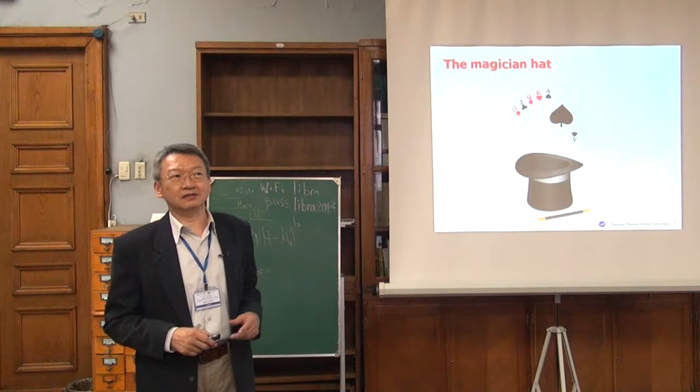Instead of a hydrologist or a professor, I prefer to think of myself as a magician, because of the magician's hat. You all know the magician performance, the rabbit coming out of the top hat. Maybe you're tired of the rabbit and prefer a rose, a scarf, or a poker card. But we never know what will come out next, because the magician's hat is not transparent, and we don't know the detailed structure inside, so we cannot predict what the next object will be.

So maybe our watershed is just like this black box. We do not have enough knowledge to catch all the detailed processes of hydrology. Maybe you oppose my opinion because you think we already have very good skill to do simulation, but maybe we can discuss this topic.

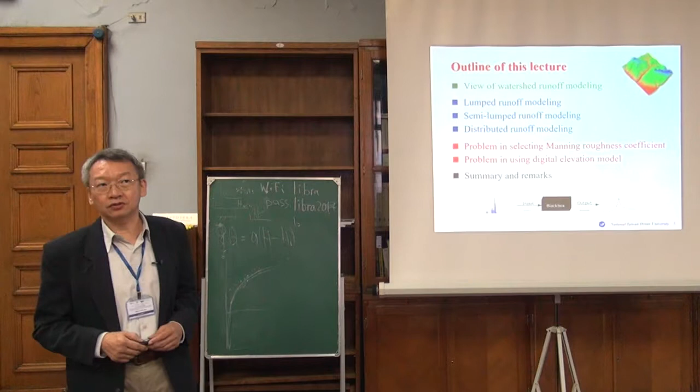The outline of this lecture: we describe the view of watershed runoff modeling, moving from lumped to semi-lumped to distributed runoff modeling, since more knowledge about the watershed rainfall-runoff process is included in this approach. But I think there's still a problem in selecting Manning's roughness, and also because distributed runoff modeling requires the digital elevation model, which is also a problem.

For the view of watershed runoff modeling, previously hydrologists tried to view it from this side: we collect rainfall data and runoff data, and then we build up the black box like this.

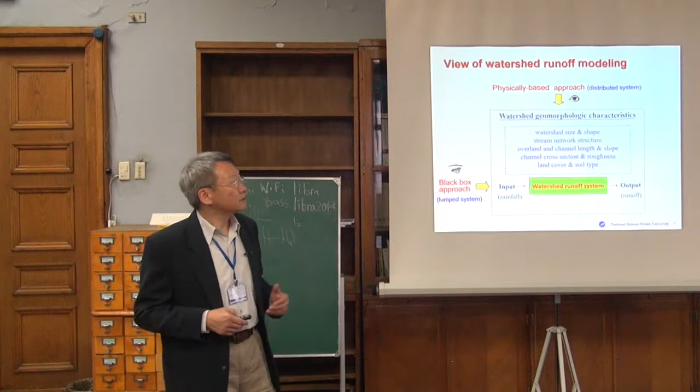When we know more about the detailed process, we try to collect data on watershed size and shape, stream network structure, overland and channel flow length and slope, channel cross-section, roughness, land cover, and all detailed information. Then we think we have enough capability to make a physically-based approach.

But is that true or not? That's my question. I think the whole knowledge system works like this: we collect a lot of data, and when we understand the relation, we change the data into information, and then we have knowledge. If we understand the relation pattern, then we have wisdom to catch all the principles.

In the hydrologic process, we collect rainfall, discharge, soil, land cover, and watershed topography data. Then we try to bridge the rainfall-runoff relationship, and the relationship between slope and runoff, and soil and land cover and runoff. Finally, we think we have enough knowledge and capability to build hydrologic modeling, hydraulic modeling, and do watershed management because we have a model.

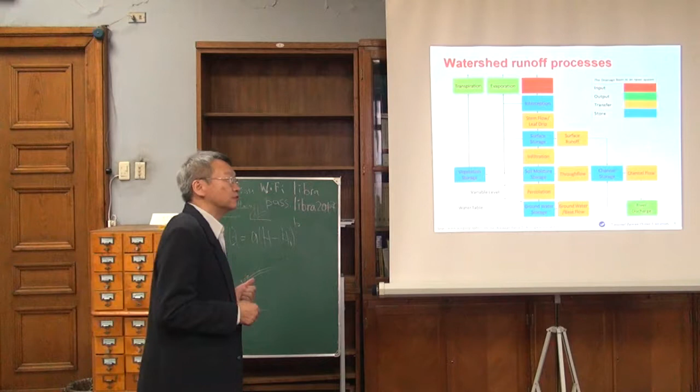So I'm not sure what state we're really at—maybe we don't have enough knowledge to do that. In the first-year hydrology course, we learn about the input precipitation leading to the output, the river discharge, and all the detailed processes: evaporation, infiltration, evapotranspiration, and all the storage. So we think we have enough capability to do hydrologic modeling.

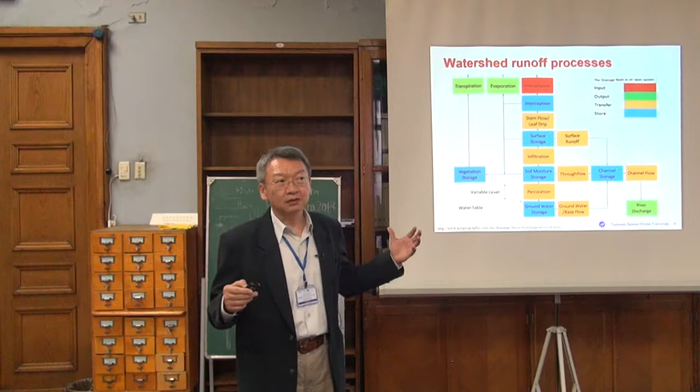But maybe our knowledge is limited—for example, with evaporation, we can catch the detailed phenomena from an evaporation pan, and we understand the infiltration process from an infiltration plot, but only at a very small scale. For a watershed, that means maybe 100 square kilometers or 1,000 square kilometers, and at that scale the link is not so clear. So maybe that's the problem.

So we try to move from the lumped approach, because we just need to know the rainfall and the runoff, and then we have a simplified function to do this simulation.

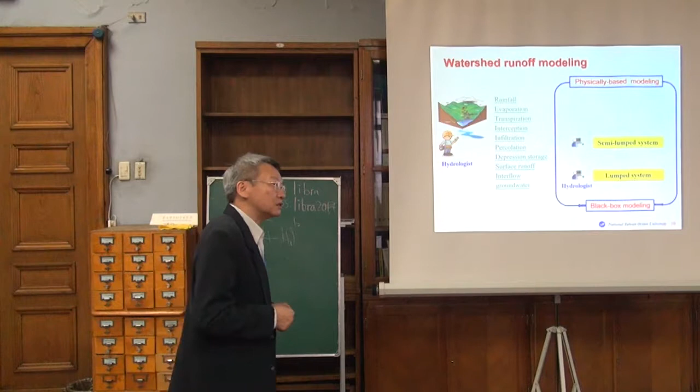And when we get more detailed information, we try to do the semi-lump, and finally distribute it. We think, or we hope we can do this thing. So from the lump, the most early hydrologic doing,

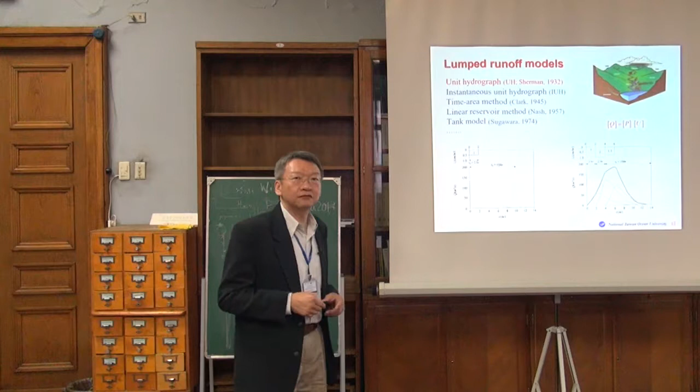lump runoff model like unit hydrograph. I think all of you know that we only collect the data, rainfall data, and the runoff data, and then we have this function, unit rainfall and unit runoff. So the time distribution of this runoff, and then we can use linear proportional and linear superposition to estimate the possible outflow at the watershed outlet, and then instantaneous unit hydrograph, because we don't want to do too much transfer from different duration of the UH, and also the time area method.

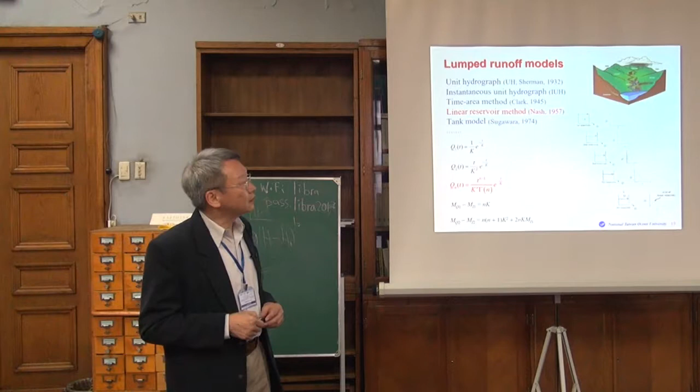If we got a map, then we can do the simulation, and the linear reservoir is a famous one. So the watershed rainfall runoff process can be simulated by a series of linear reservoirs.

Old tank model, I think yesterday we mentioned about this one. And basically this tank model can be simulated as a linear reservoir model in series or in parallel. So a model like this we can transfer into a series of linear models.

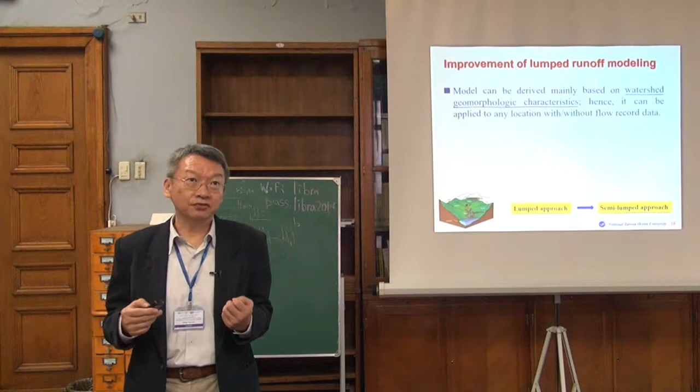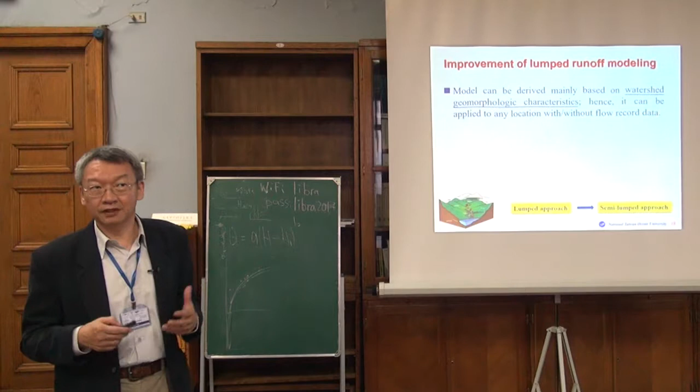So when we want to move from the lump model to semi-lump, we hope our model can be derived mainly based on watershed geomorphology characteristics. So we don't rely on the measured data. We may not have to collect all the detailed discharge data, and then we only base it on the watershed geomorphology characteristic, and then we know all the mechanism.

And also we hope our model can be performed with high efficiency, because when you get more mechanism into the model simulation, you need more time for computation. So that's maybe a problem.

If we get more information and we have a lot of time, this kind of model may not be applicable for real-time forecasting. So of course we also think, because the previous lump model is linear, we hope when we try to modify from lump to semi-lump, we can account for watershed hydrodynamic property, if we can consider the watershed nonlinear or time variant characteristic. That's what we hope. So we move from lump to semi-lump distributed, semi-lump runoff modeling.

So I think the first, maybe the earliest one, is the U.S. Soil Conservation Service synthetic hydrograph model. In this, they try to collect more information instead of only watershed area as in most lump models. So they collect watershed length, slope, and land cover as a curve number. So that's land cover, soil type, and antecedent condition of the watershed. In this case, they have moved from the lump model to semi-lump model.

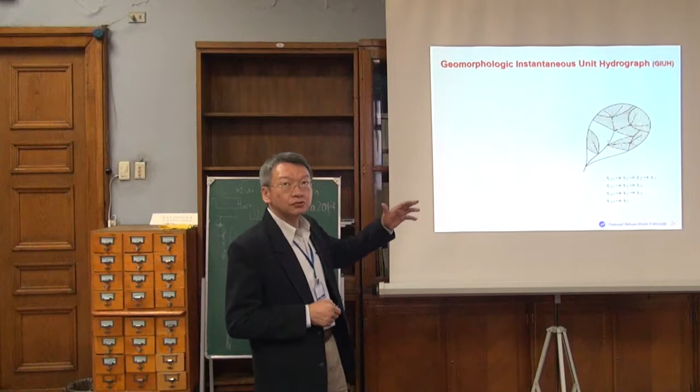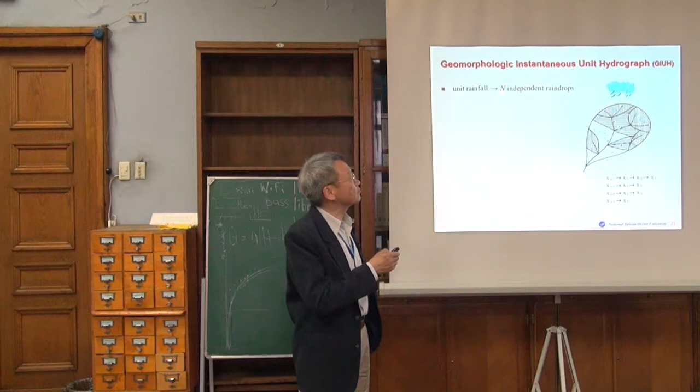For unit rainfall, he assumed this unit rainfall consists of n independent raindrops. So for a raindrop falling on the first order overland, then to the first order stream, second order stream, to third order stream, to the watershed outlet. So for another rainfall particle falling on the second order overland flow, then second order channel, to the third order channel, to the watershed outlet.

So in this third order watershed, all the runoff paths can only be separated into four different flow paths. That means the first order overland flow to the first order channel, to the second order channel, to the third order channel. And this one is second order overland flow to the second order channel, to the third order channel, to the watershed outlet.

In this approach, we don't want to do distributed grid-based routing. In a third order watershed like this, there are only 4 different flow paths, so you don't need to do a lot of computation. You only do 4 different flow path routings. Each flow path can have a probability of a raindrop adopting that specified flow path.

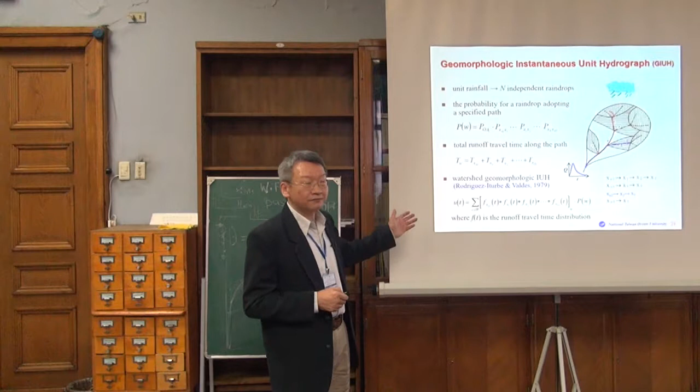After we have the runoff travel time along a specified runoff path, we can derive the detailed watershed geomorphologic IUH. We use a probability distribution because, as this figure shows, there are a total of 7 first order streams with different lengths, different slopes, and different channel cross sections. So if we try to group the first order channels or first order overland flows, we use the probability distribution.

And then we can change from the runoff travel time here to a convolution. This convolution integral is the IUH of the watershed geomorphologic IUH.

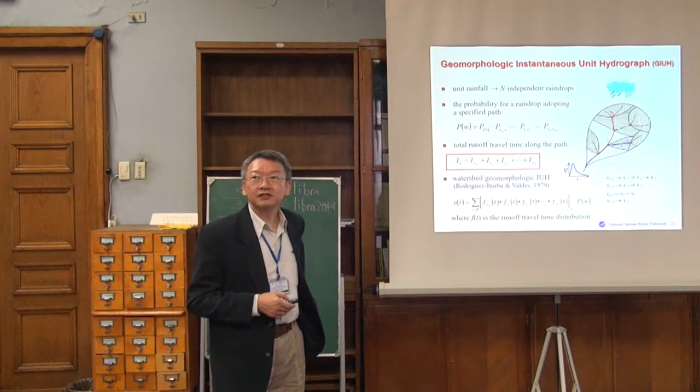So the next problem is how can we precisely estimate the runoff travel time. Previously, we already have the runoff travel time for the overland flow. We consider the overland flow length for each order, the overland slope, the overland flow roughness, and the rainfall intensity, and from these we derive the overland flow travel time for each order, which we derived in 1997.

If we use a digital elevation model to extract all the detailed geomorphology characteristics and information, we can use this equation to derive the overland flow and channel flow runoff travel time, and then we can have the detailed structure of the runoff process from upstream to midstream to downstream to the watershed outlet.

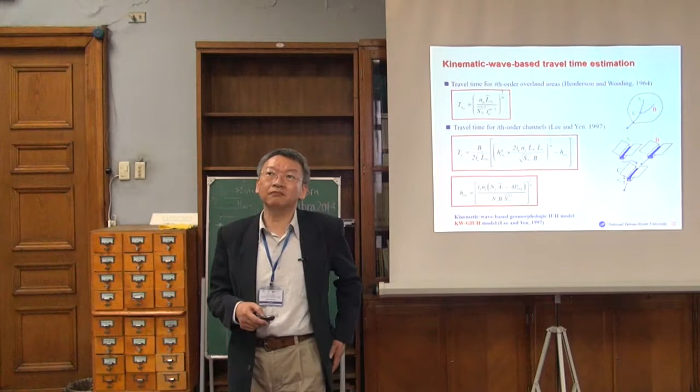So we call it the kinematic wave-based GIUH model. This kinematic wave GIUH - you know the IUH, and GIUH means the geomorphology IUH. KW-GIUH means the kinematic wave-based geomorphology IUH model. We developed this model in 1997.

Here is the basic structure of the model, because we assume the probability distribution is exponential distribution, which is what we usually use in the linear reservoir model. We have another study trying to extract the geomorphology factors from a watershed to see if the exponential distribution is adequate to simulate the runoff travel time. Basically, the exponential distribution is good enough for this simulation.

Once we have a digital elevation model and obtain all the detailed geomorphology factors, like the overland flow length and slope for different orders, and the channel length and slope for different orders, and the stream network structure of the watershed, we can have an analytical solution for this kinematic wave-based GIUH model.

You can see from this figure, because we hope our model can consider the hydrodynamic effect, we use the kinematic wave, which can consider the rainfall intensity. In this equation, for the overland flow runoff travel time, you have a rainfall excess intensity, and for the channel, we also have IE, the excess rainfall intensity.

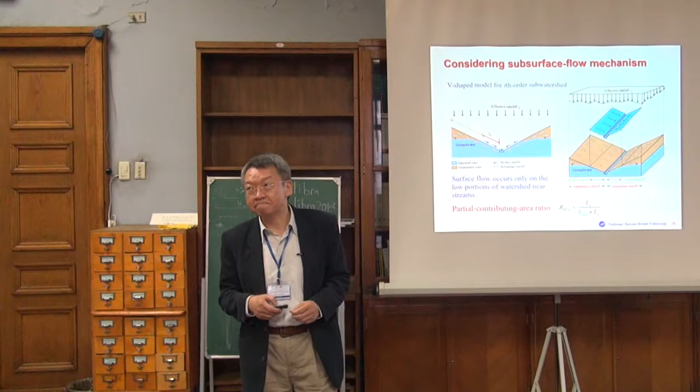Of course, at the beginning of the runoff simulation, it depends on the antecedent soil moisture condition, which we can account for if we have the rainfall data. As we get more rainfall on the soil, the partial contributing area increases gradually.

So we did this simulation and changed the structure of our rainfall-runoff model. We consider the flow path probability — we have surface flow and subsurface flow. For the runoff travel time, we consider both the surface flow travel time and the subsurface flow travel time, and also two IUHs: subsurface IUH and surface IUH. We assume these can be linearly superposed. So this is our model structure.

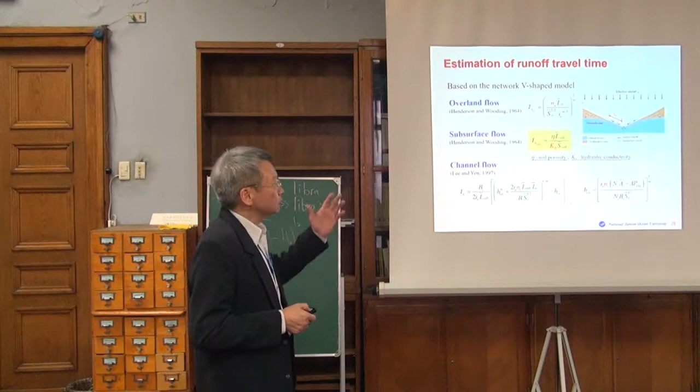We changed it from only considering the surface flow to further considering the subsurface flow mechanism. For the surface, as before, we use the overland flow with the Henderson and Wooding equation, and we also derived an equation for the subsurface flow, and in 1997 we derived the equation for the channel flow. After that, you can see the previous n value now comes down to 0.6.

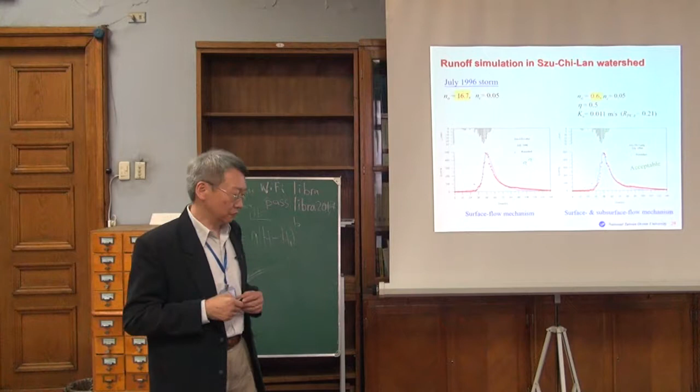This is because we included the hydraulic conductivity in our model. So I think this model parameter value is now acceptable, and we believe we have achieved a physically based approach — of course, it's still just a semi-lumped approach.

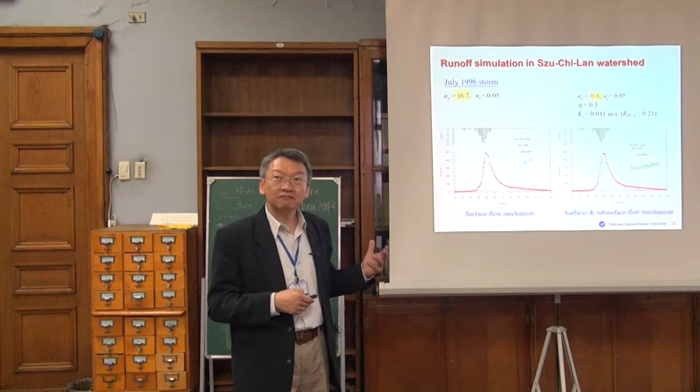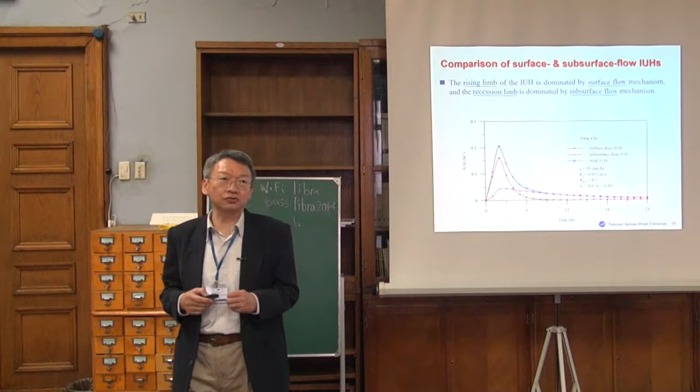I think we only used a semi-lumped distributed model to simulate all the hydrodynamic effects, and we got a very good result. The rising limb of the IUH is dominated by the surface mechanism, and the recession is dominated by the subsurface. So here we just mentioned the partial contributing area, which depends on the antecedent moisture and the total rainfall in this watershed.

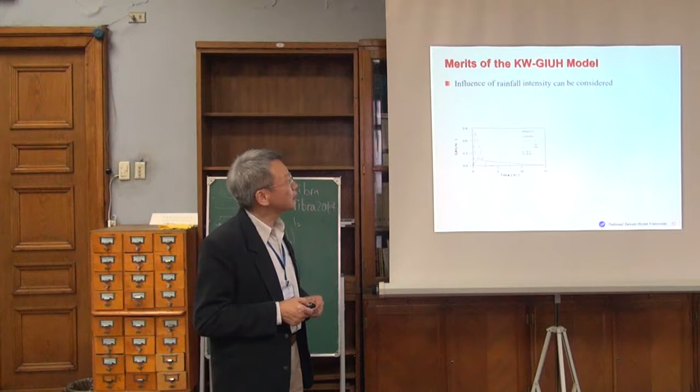So here's the merit of the KW-GIUH, we call it the kinematic wave geomorphology IUH approach. In this approach, the influence of rainfall intensity can be considered, and the influence of urbanization change can also be simulated, because in Taiwan we use this, since we can consider the runoff coefficient and also the overland flow roughness and channel flow roughness.

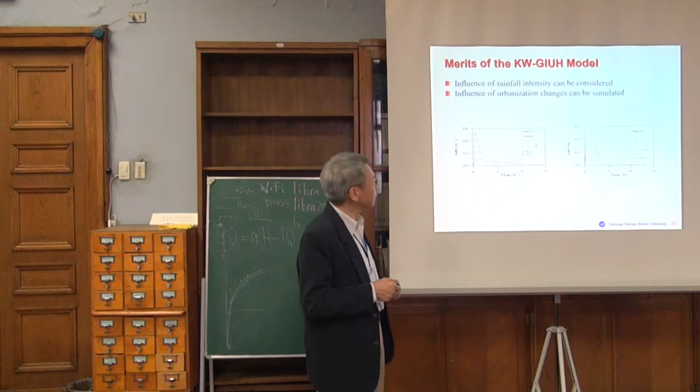When watershed urbanization occurs, the overland flow roughness will decrease, so based on the change of Manning's overland flow roughness, we can simulate the influence on the runoff hydrograph. Also, flow frequency analysis in ungauged areas can be performed.

We use this for some ungauged watersheds in Taiwan, because we have long-term rainfall data. We put all the rainfall data into our model and obtain all the detailed geomorphology factors using a digital elevation model, and then we can do the simulation. So if we have 30 years of rainfall data, we can generate 30 years of runoff data and do the runoff simulation.

We have tested this on several, many watersheds, I think more than 10, and used this model to predict the frequency analysis in ungauged watersheds.

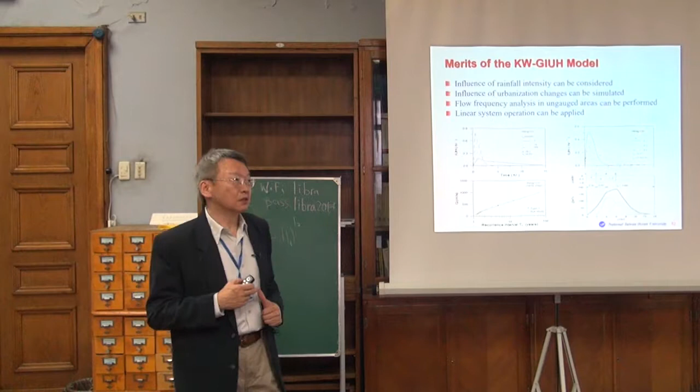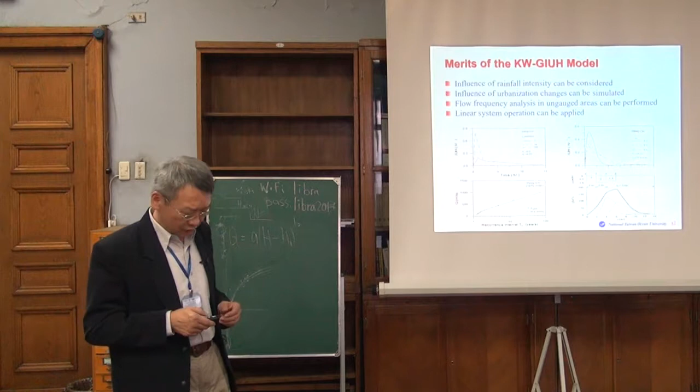Also, because we use linear proportionality and linear superposition, all the computation can use linear system operation. So we do not need a lot of computing time, and we can do real-time forecasting. So this is the model we have done.

This model has been applied to Taiwan, in more than 85 watersheds, and basically we have very good simulation results.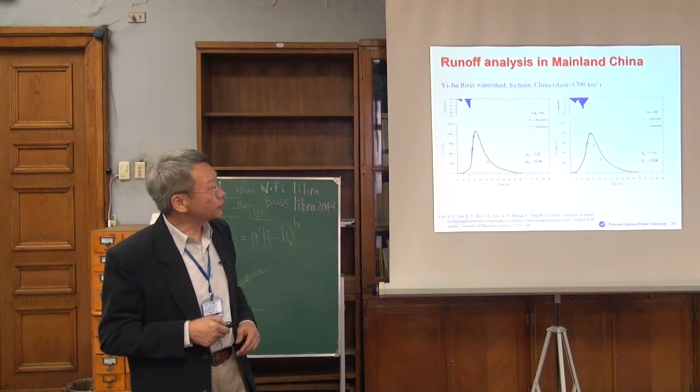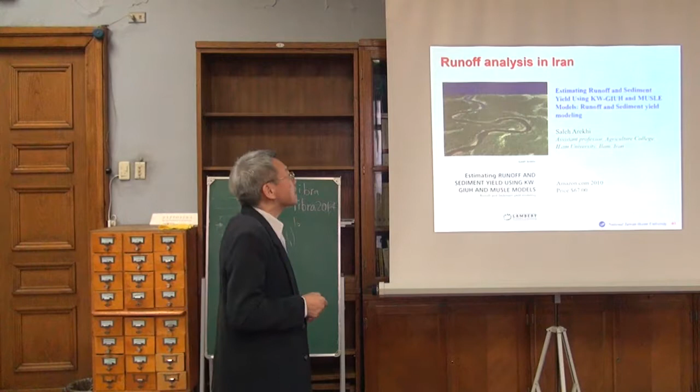This model has also been applied to Russia, because I have an international cooperation project with Dr. Gassman. It has also been applied to the United States, mainland China, India, Palestine, and Japan. Even one hydrologist in Iran wrote a book about the KW-GIUH and MUSLE, but I have never met this person. The model is currently applied in more than 8 countries in the world.

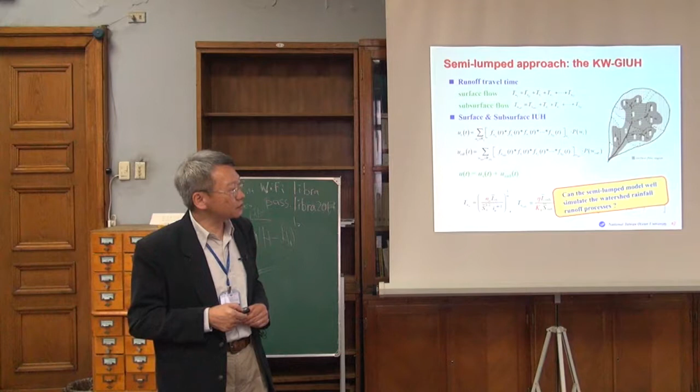So the question is, can the semi-lumped model simulate the watershed rainfall-runoff process? From my point of view, no. This is because in this approach, we group all the first-order streams and all the first-order overland flow into a group.

So we try to use a probability distribution to include all the spatial variation, the non-uniform distribution of the watershed.

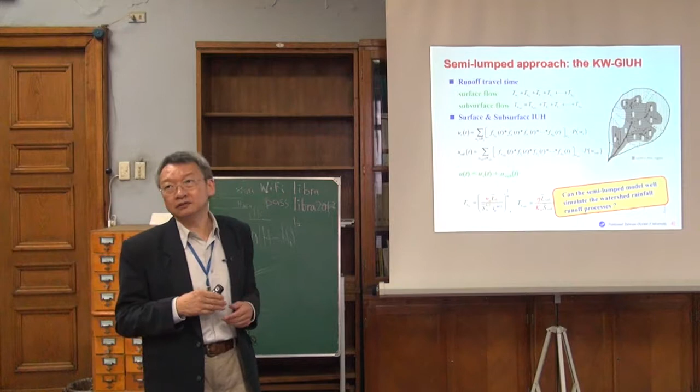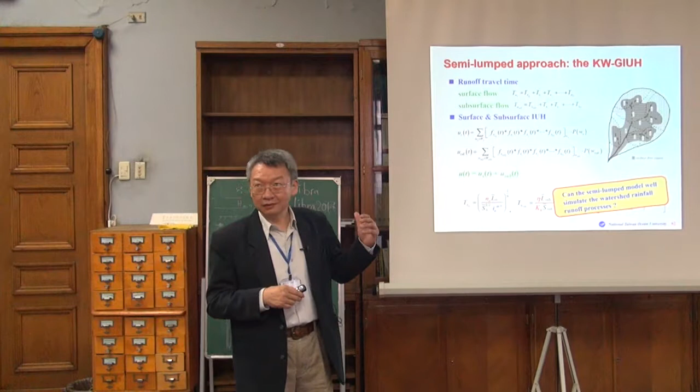So I think maybe, if possible, if we have enough computer capability to do fast computing, we should move from the semi-lumped model to a distributed model. That's what I'm trying to do. Maybe we should reach toward distributed runoff modeling.

All the model input requirements include very detailed rainfall, runoff, digital topography data, land cover data, and channel cross-sectional data. If you try to use the distributed model, the practical problem is that a lot of computing time is required for the runoff simulation.

Of course, if you have a supercomputer, maybe you can do this for real-time flood forecasting. But I think we do not have enough supercomputing resources, so for real-time flood forecasting, usually we cannot use this kind of model.

So if we try to use this approach, the problem we need to solve is how to increase computing efficiency. That's what we need to do, because all the dynamic wave, diffusion wave, and even kinematic wave models do not have an analytic solution.

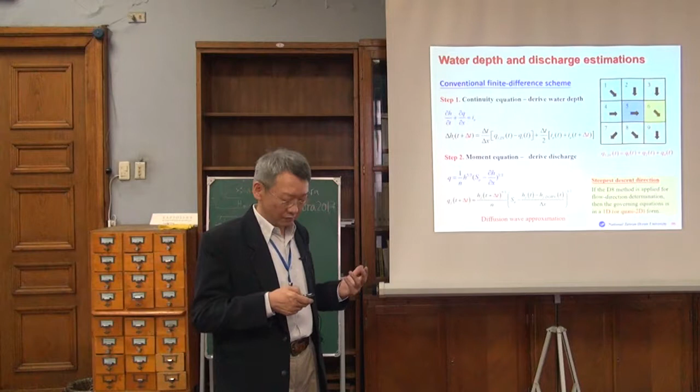Because if you try to select a very small delta t, you need a lot of computing time. But if you try to use a large delta t, then maybe you cannot detail describe the wave transport. So we are thinking how to determine the adequate delta t. We hope we can use a large delta t, but instability problem is the next one we need to face. So the most important thing for numerical simulation is trying to select an adequate computing time interval.

Previously there were two criteria for stability for the numerical instability problem. The first one is the Courant-Friedrichs-Lewy condition. That means the numerical marching speed, delta x divided by delta t, must be larger than the wave celerity, and then we can accurately describe the moving of the flood wave.

So we can use the Courant restriction equation expressed like this, and from this we can determine the delta t. So we use this delta t to avoid the numerical instability problem. That is the first criterion.

And the second one is the Courant condition. In a flat, mild slope area, for the first time step the water level is higher on the left side, and it moves from the left side to the right side. After t plus delta t, too much water moves from this side to that side, so the water level in the next time step is higher, and the right side becomes higher than the left side.

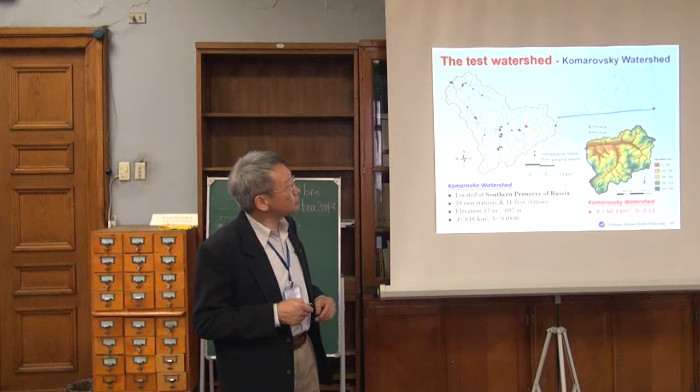So we have two limitations when we want to do the finite difference equation. And of course you want to know exactly what the value for this delta t is when we do a practical rainfall runoff simulation. We use the data from the Komarovka watershed.

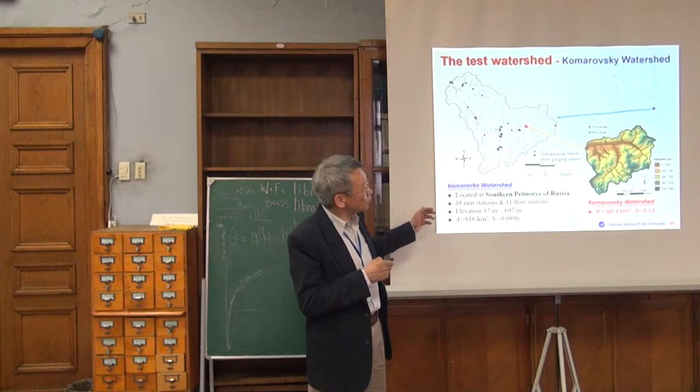Previously, I think the Komarovka watershed is an experimental watershed, and the total watershed area is around 600 square kilometers. It's too large for this test, so we try to only use a small subwatershed, Komarovsky, which is only 60 square kilometers.

So you can see, because we use this flow hydrograph to demonstrate, the second hour is just the beginning of the storm, and the 20th hour is the peak time of the storm.

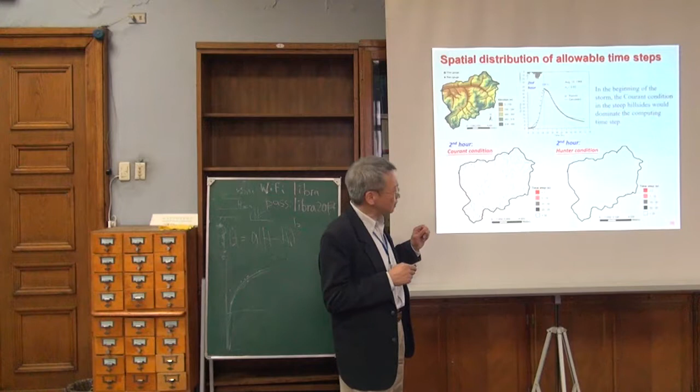So you can see, if delta t is determined under the Courant condition, the black line is about 20 or 30 seconds. Because under the Courant condition we consider if the velocity is high, then for the upstream of the stream network the velocity is quite high, so under the Courant condition the small time delta t required is just like the stream network.

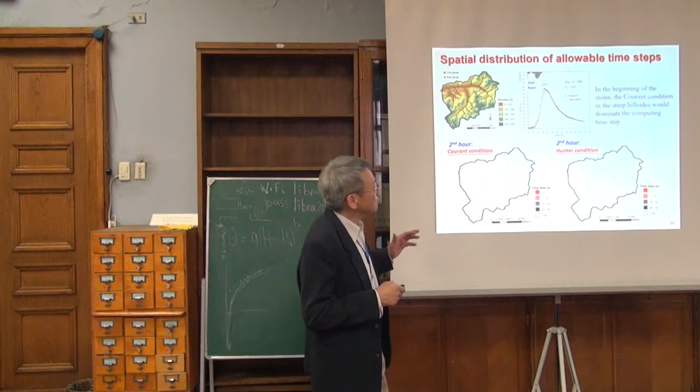And because at the very beginning only a little water enters the watershed, there is no flat area. So basically, under the Courant condition, all the calculation time steps are larger than 30 seconds. So at the very beginning, the Courant condition dominates the selection of the computing delta t.

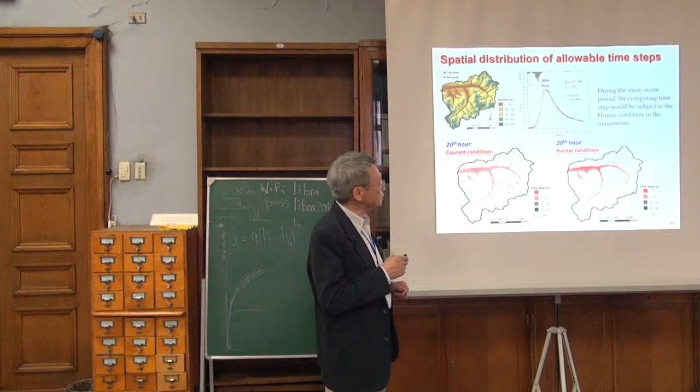So for the 20th hour, this is the peak time. You can see under the Courant condition, because a lot of water has collected into the stream network, in this portion most of the delta t selected is less than 1 second, only around 1 second. And of course for the Courant condition it's less than maybe 0.001 second.

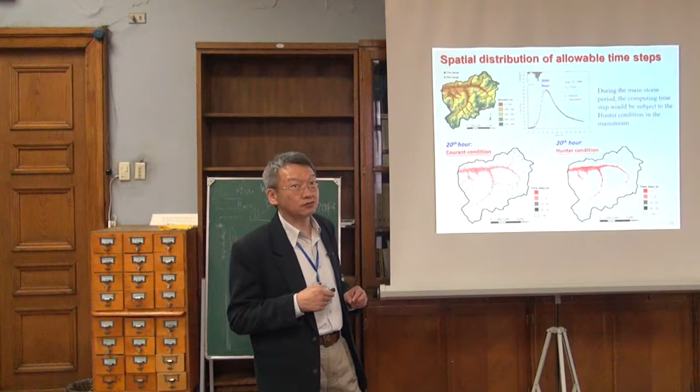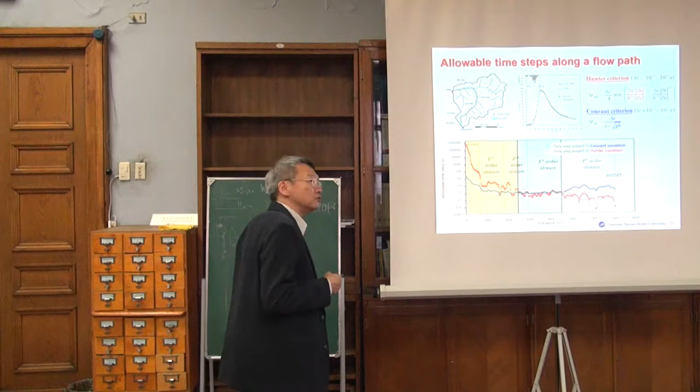So once the downstream requires a very small time interval, all this grid needs to use a very small time interval. This results in all the computation in most of the period, in a whole storm simulation, needing a very small time interval, which results in a very long time for this simulation. So in most cases, we cannot apply this distributed model for real-time flood forecasting.

So because we met this problem, we are trying to see if we can make some changes so that all this computing time interval can be enlarged.

One approach was proposed by MacCormack, a recursive formulation. Here, the original first step is we use the continuity equation to derive the change of water depth, and then MacCormack proposed an equation like this.

This is a little complicated, maybe I can explain it next time in the next PPT. Once we estimate the water depth from the continuity equation, we can use this in the momentum equation to derive and estimate the discharge.

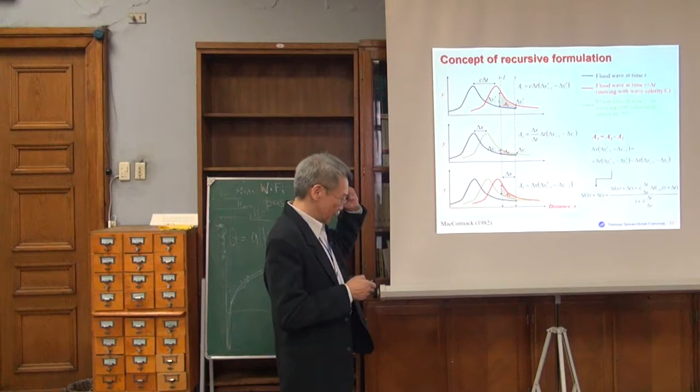So the problem is, what is this? Maybe we can use this figure to explain. Here the black one is the flood wave at time t, and the red one is the flood wave at time t plus delta t, moving with c, the flood wave celerity.

At time t plus delta t, the flood wave should move to this place. This is the distance, this is the water depth. If we choose a large delta t, because MacCormack's modified recursive formula tries to modify the water depth, he used an enlarged delta t.

So when you use an enlarged delta t, that means the numerical marching speed is very slow compared with real-time flood forecasting — the flood transport appears slow. You can see when we use the MacCormack scheme, we get a green hydrograph, and this green hydrograph is slower than the red, the real hydrograph.

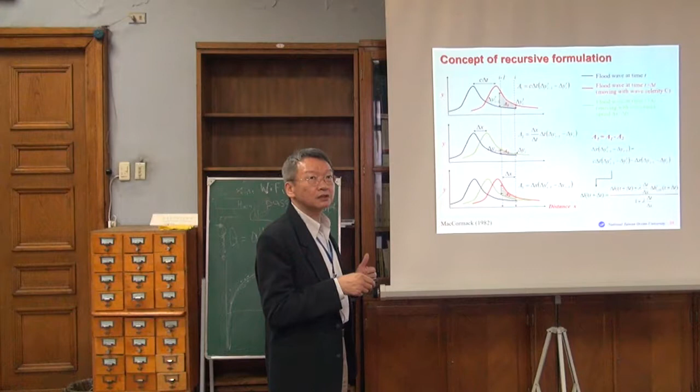So the modification tries to adjust for the deviation of this hydrograph. He used this kind of equation, and after using this equation, they can modify the increment of water depth.

But in 1982, MacCormack derived this equation, and it can only be used in one dimension. That means when we estimate the blue point, before that we need to have the red point, this term, the red point, so it can only be used in one dimension.

Like a river, so we already have this point value, and then come downstream step by step. For our case, we use a digital elevation data set, which is basically two-dimensional. We usually calculate from the left corner to the right lower corner, step by step.

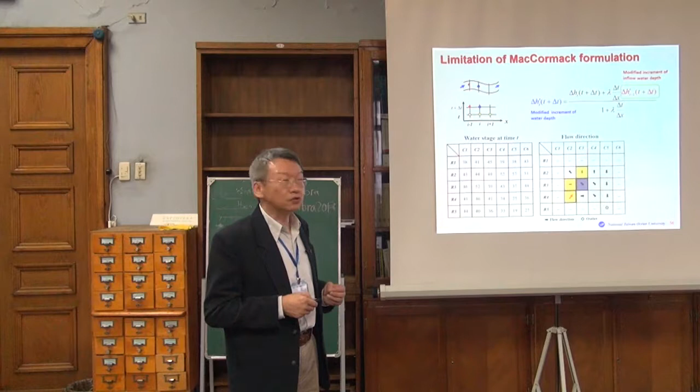So if we want to estimate the water depth at this point, of course flow comes here, and this also. It's okay, but when we calculate at this location, we do not have this value. So the MacCormack recursive formulation cannot be used in this case, and we're trying to remodel this approach since we cannot use this formulation.

So we propose a new sorting scheme for the computation sequence. That means we sort the water stage of each cell, the value being the water stage at time t. So you can see this is the highest one, this the second one, third one, and the fourth one.

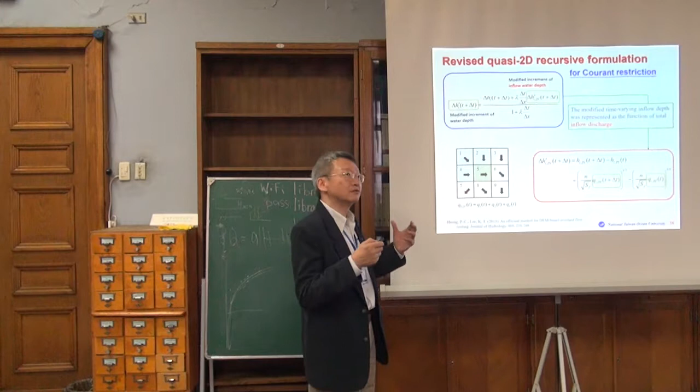So we're sorting this, and this is the first, second, third. The sorting time is quite limited in comparison with the previous approach. We choose a very small delta t. After we assign the routing sequence according to the descending order of the water stage, we can do the simulation. We also transfer from the water depth to water stage discharge, so we can do the summation, because the flow collects from different directions of the nearby grid.

The other condition we need to consider is the Courant condition. It's fortunate, I think we are lucky, because Bates in 2010 derived the modified diffusion equation, since previously we used a diffusion wave equation like this, omitting all the inertial terms. He found that if we consider the local acceleration, we can avoid the reflux, the back and forth flux we mentioned. So we have this equation, and this local acceleration included in the momentum equation can alleviate the checkerboard oscillation we mentioned.

So we integrate all these into a modified numerical scheme, and then we can accumulate the inflow discharge step by step. Here is the result. Originally we may have needed a very small time interval, like 0.001, but now for the whole process we can use 60 seconds from the beginning to the end of the storm flood.

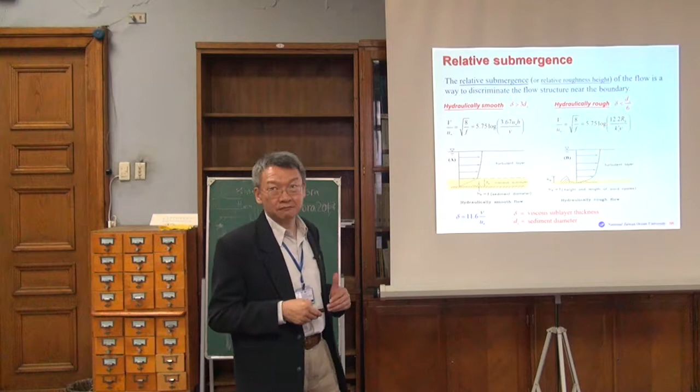Two problems I propose here. The first is the Manning's roughness coefficient. Manning's equation - you know about Chezy, Manning, and Darcy-Weisbach. Darcy-Weisbach is more applied in pipe flow. There have been a lot of experiments trying to use different boundary roughness to describe the flow velocity distribution. However, this equation, in most cases, is not used in open channel or stream network computation - so we use Manning's.

But I think Julien did a very good report describing what is the adequate region for applying Manning's roughness formula. He said it's only valid based on the submerged ratio. What is the submerged ratio? This is the water depth divided by the roughness element's sediment diameter or roughness height. He used the submerged ratio to describe the region where we can have a good simulation using Manning's equation. However, for this portion, the submerged ratio is comparatively small.

That means we have a very shallow water depth, and the roughness element height is large - this is basically the overland flow region. In overland flow region, as you can see in this figure on this axis, we should have a very high value of roughness. That means when you do the computation for a whole watershed, you may not be able to use only one single roughness value. Of course, you might say you use a remote sensing image map to determine different land cover conditions and then determine the roughness, but you do not determine or distinguish the watershed runoff, the water depth. That's the problem - if we can consider the submerged ratio.

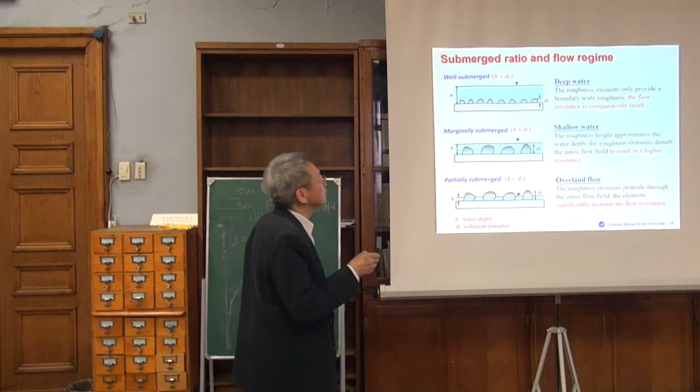So what is the submerged ratio? Maybe this figure is easier to understand. For deep water, the roughness height is here, so we have very high water - in this case the flow resistance is comparatively small. In most cases, I think we use the open channel hydraulic information from Dr. Ven Te Chow's book, so the roughness coefficient is basically determined in this region.

However, for shallow water, the water depth is almost the same size as the roughness height, and this will result in higher resistance. For the overland flow case, the roughness height is higher than the water depth, so the roughness element significantly increases the flow resistance.

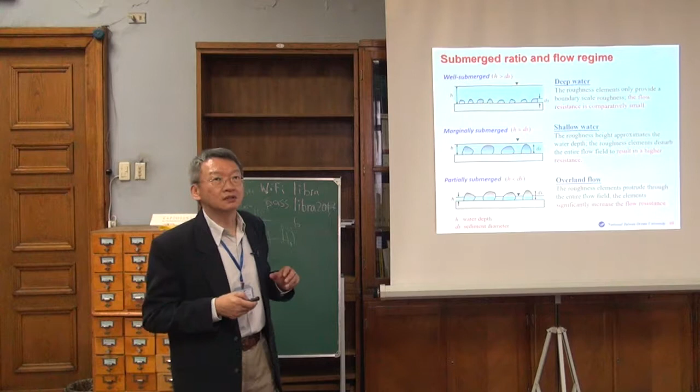So when we do a watershed like 1 kilometer square, there are maybe more than 100,000 grid cells. So how can we determine the spatial variation of the roughness coefficient?

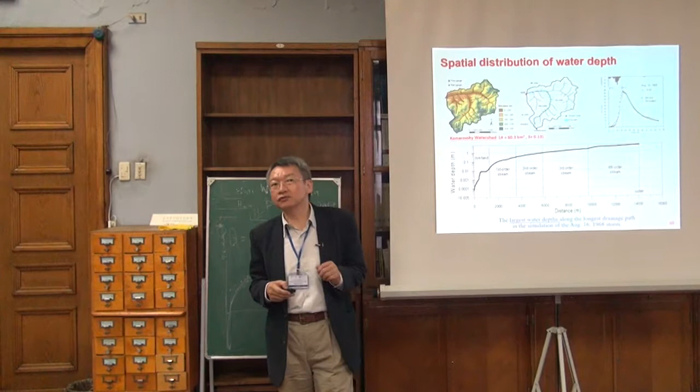So comparing with the last paragraph, we will consider how we can determine the roughness coefficient. You can use this figure.

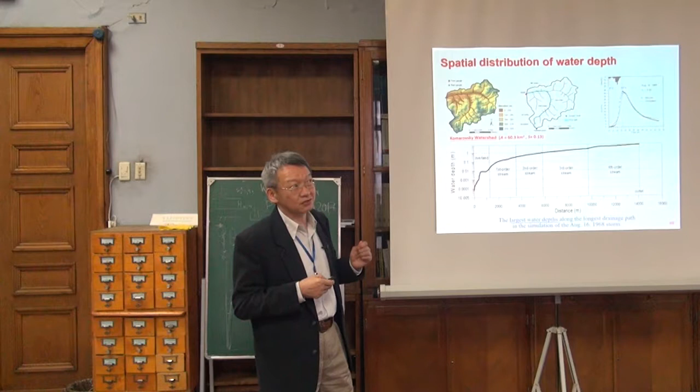Maybe you think since we already have the water depth, we can determine the submerged ratio. But I think basically the water depth depends on the roughness coefficient you have selected. So it's not easy to determine based on the already calculated water depth, because that water depth is based on the selected roughness coefficient.

So we use a digital elevation model to determine the flow direction, and then we know the flow accumulation value. What is a flow accumulation value? For this point, it collects water from this grid and this grid, so these two grids collect water from the upstream 2 grids. Here is a total of 36 grids, so at this watershed outlet, they collect 35 grids from its upstream. This we call the flow accumulation value.

So the water depth's spatial distribution in the watershed can use this FAV, the flow accumulation value. Once we have this value from the digital elevation computation, you can determine the water depth distribution. And once you have the water depth, you can calculate the submerged ratio, and using the submerged ratio you determine the roughness variation. That means we can obtain the spatial distribution of roughness.

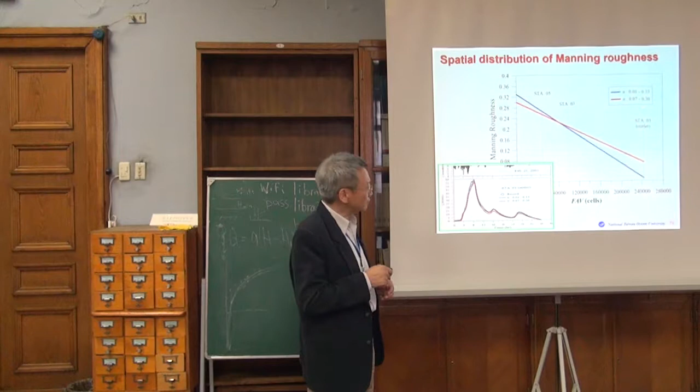However, we can see for these two lines, we almost have a very good simulation compared with the measured data. So this is the question, since we just mentioned the Manning's roughness.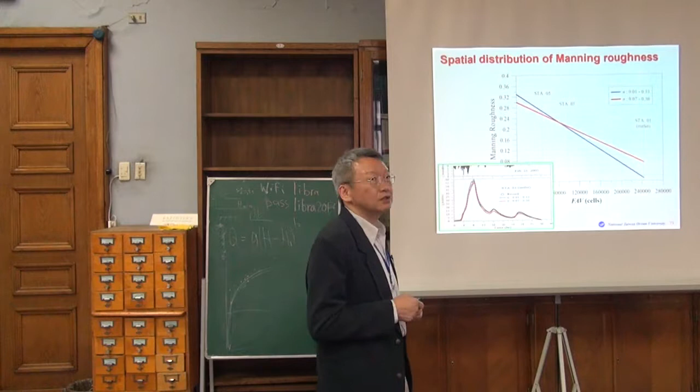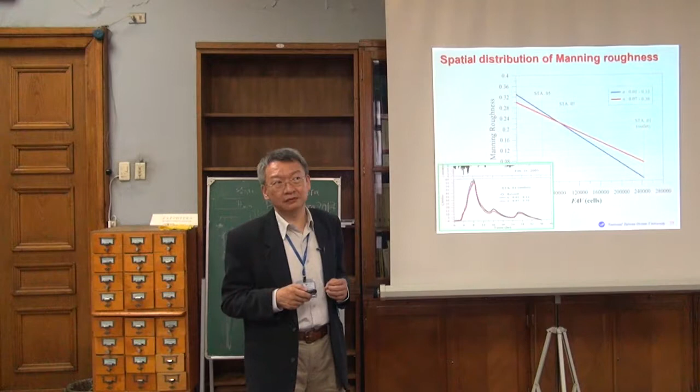I think for all hydrologists, the Manning's roughness coefficient is physically a very clear parameter. However, maybe it's not exact. We know the tendency, but we may not really understand what is exactly the value for our computation. So that's the first problem I need to solve in the future.

And the next problem is we usually use the digital elevation model, because when we do the distributed runoff simulation, we usually use the digital elevation model. I don't want to spend too much time on this, because I think all of you use a commercial package to handle your digital elevation model.

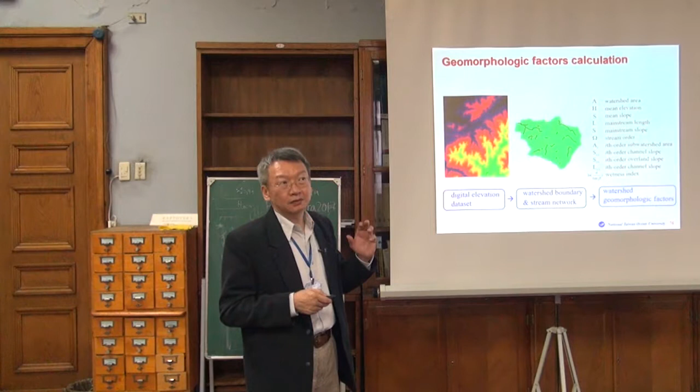Once you have the digital elevation dataset, you can do the flow direction determination, depression filling, flow accumulation value as we just mentioned, and we can extract the channel network and do the subwatershed delineation, and finally obtain the geomorphology factor. So we use a commercial package, or I developed my own digital elevation model tool to obtain all the detailed information, because as I just mentioned, the KW-GIUH model needs a lot of detailed watershed geomorphology factors based on the stream network structure and different stream order.

If you do digital elevation model research, you'll find that first we need to determine the flow direction. So for rainfall falling on this part, this is the elevation data, and if we use the steepest descent method, that means the maximum slope, the water will flow from this direction to here.

And if we consider allowing multiple flow directions, because this elevation is lower than this one, and also this one, they will have 3 directions for the flow. If you check the previous literature, you'll find they have D8, multiple D8, D4, D infinity, and multiple D infinity measures.

The steepest descent from here to here is the D8 measure. If we allow multiple directions, we call it multiple D8. For D4, we only allow flow on the cardinal directions, and we do not allow flow to the diagonal direction. This is called the D4 measure. So they allow 1 to 4 flow directions.

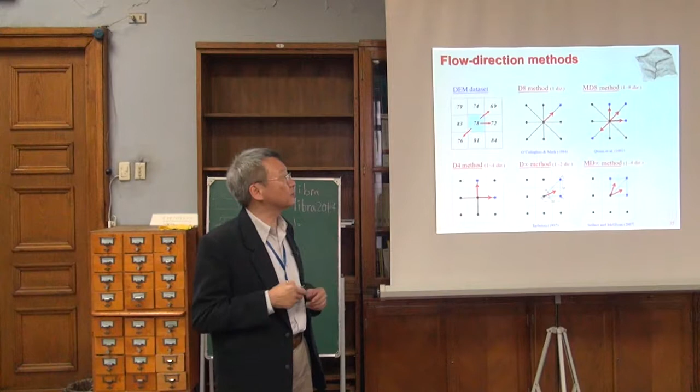And if we use a facet, that means the 3 points form a facet. If we choose the maximum slope of the facet, we call it D infinity. If we allow 2 maximum slopes for the facet, we call it multiple D infinity. In this case, you will see this one has the most concentrated flow direction, and this one has the most dispersive flow direction.

So we have this result: this is the number of flow directions, and this is the area percentage. In the D8 measure, all the flow direction concentrates in only one direction, while the multiple D8 direction measure shows a dispersive phenomenon. So I think you can expect a result like this.

We have a very concentrated one and a very dispersive one. You can see this portion — in the original D8 measure, we do not have this portion. Moreover, the stream network structure is not similar to this one. So that's the question: what is exactly the best way to extract the stream network or the watershed boundary? What is the real one — this one or this one?

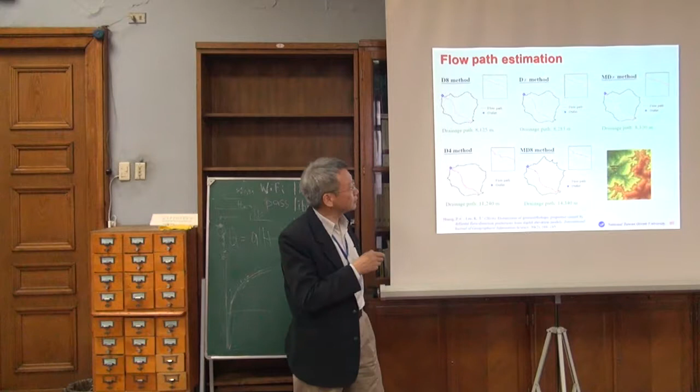Of course, just by looking at this figure, you do not have an exact value. So if we have a value like this, we try to find the longest flow path from this way to this way. We find that the drainage path is about 8,000 meters. For the most dispersive case, we have almost two times that.

You know, we usually use this geomorphology factor — the longest flow path — to estimate the travel time or the time of concentration. Then we use this time of concentration with something like the SCS triangular unit hydrograph method to estimate the time to peak and the peak discharge. So if the deviation or difference is quite large, what is exactly the one that should be most similar to the real watershed? That's the question. We also have the width function — I think maybe you know that width function.

We call this the width function, or the hydrologic response function, or maybe the IUH, the instantaneous unit hydrograph, because we count the number of links for a given distance from the watershed to the watershed outlet. So basically, you can think of this as a hydrologic response function of the watershed.

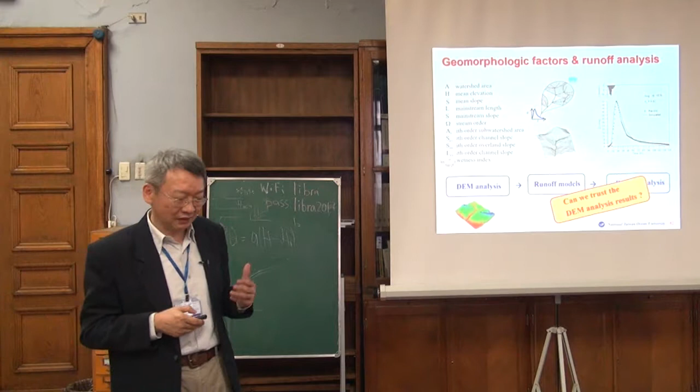So can we trust the digital elevation result? I think the first problem, as I proposed, is Manning's n, we do not have a very good deterministic approach to obtain the exact value of Manning's n. The second problem is what is the best way to use the digital elevation dataset for geomorphology factor extraction. Of course, if you use a commercial package, it usually uses the D8 method. But in reality, what is the real condition in the watershed?

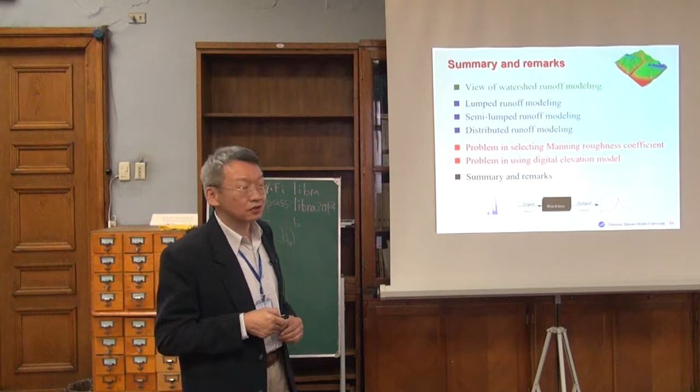That's the problem. So, a short summary and remark on what I mentioned in this lecture: in the lumped and semi-lumped models, we use a simplified lumped structure for runoff simulation. Previously, different people tried to use different concepts to obtain this, including kinematic wave-based approaches.

Geomorphology IUH tries to obtain all the detailed geomorphology factors of the watershed to build up our IUH model. Basically, we can use a map or digital elevation dataset, including land cover conditions, to build this kind of model. Because it only needs a little time for computation, it is adequate for real-time flood forecasting.

On the contrary, when we use the grid-based distributed model, we can consider the spatial variation of the watershed characteristics. So in my opinion, if you're doing watershed or water resources design, maybe you can use this model, but it may not be applicable for real-time flood forecasting.

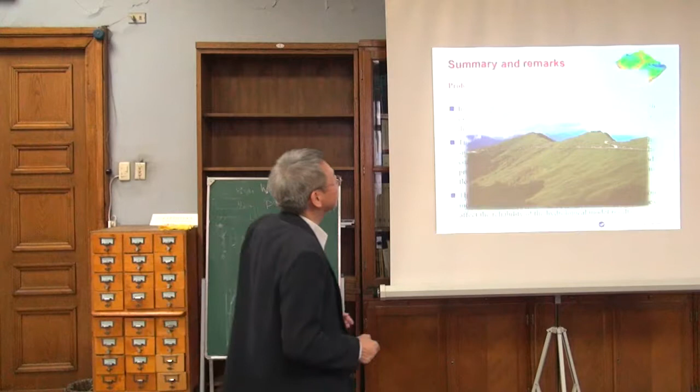Any question? You showed your conclusions that... this previous one? No.

Do you think there is some contradiction in this conclusion? If you have a territory with 10 watersheds and 10 outlets, and you say the D8 method provides the smallest watershed, shouldn't another watershed be larger? No, because all the territory should be covered by the same 10 watersheds. You consider only one watershed as smallest, but all the territory is covered by the same number of watersheds.

In fact, in this case we used a different digital elevation model dataset, and the ratio of watershed area derived by D8 versus multiple D8 is different. However, the D8 method always obtains the smallest one, though the ratio is a little different. It depends on the resolution of the digital elevation dataset, and the vertical resolution is also controlled as the most important factor for flow direction. So vertical and horizontal resolution are the most important. But I think the D8 method is always the smallest. If one watershed is smallest with the D8 method, some neighboring watershed should be bigger - do you understand? Okay, your concept is based on the watershed boundary, it's very clear.

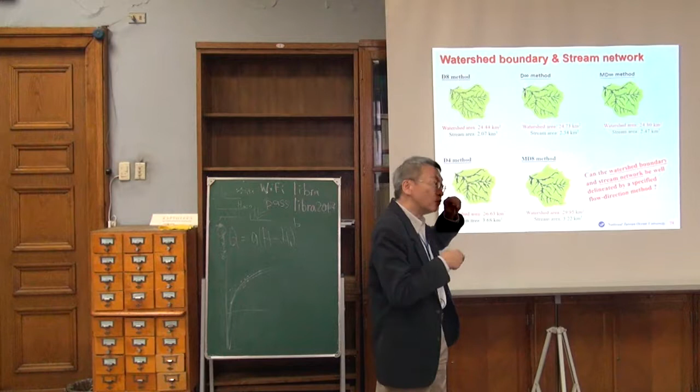However, as we see in this case, the watershed boundary for another one should not overlap - because the flow is only partly flowing to another region. But we think, yes, you are right, the neighbor watershed may overlap this one, because some water from another watershed flows to here - only a portion, not holding the whole water from the grid. So they will be overlapped, and some territories could be included in different watersheds. I see - nice conclusion.

I like the discussion about comparing Manning's roughness to the flow accumulation graphic. How can you compare flow accumulation value to this? Because if you're working with raster or a digital elevation model, the flow accumulation value will be the same every time, while water depth changes from time to time. Flow accumulation value is not the real watershed, it's just the tendency of the water depth.

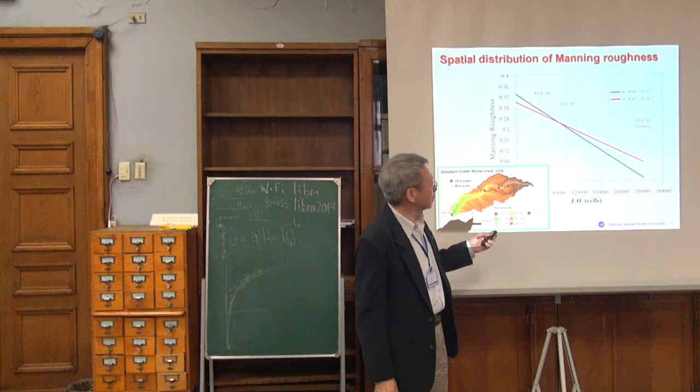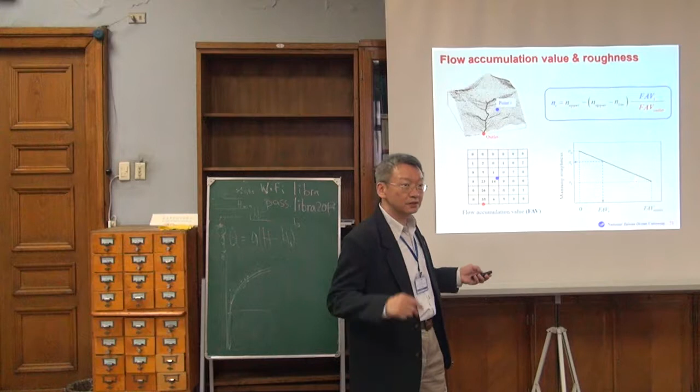In this case, the spatial distribution of flow accumulation is always the same. So I use this to determine - once I make an assumption for the maximum roughness coefficient and the minimal roughness coefficient - I get the roughness coefficient for all the grids, the spatial distribution of roughness coefficient. This will not change from time to time; for the whole storm period, it's almost constant.

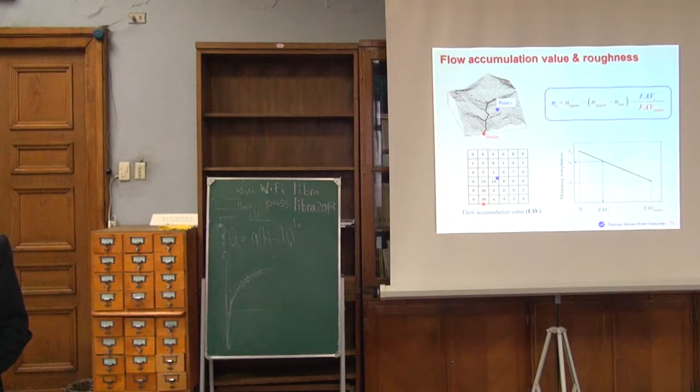The Manning's coefficient is not constant, it depends on flow depth - yes, which is another issue of uncertainty. I think the previous result from Julian was very good, but he did not propose a solution, he just proposed a question. So I'm trying to give a possible result for simulating the spatial distribution of the roughness coefficient.

I'm sorry, it's a little naive question because I'm not much of a hydrologist. We have this experimental catchment of ours - I used to run it when I was around, so I know it for 22 years. In those 22 years, I've been a lot in the field, and I've seen water running on the ground only twice: once was last year during a huge flood in the Paris area, and the other was during a very cold winter when there was rain on frozen ground.

So I don't want to make probabilities, but it seems to me that in some areas of the world, water running on the ground that can be approximated the way you show it is very rare. Of course, with the rainfall intensity you have in Taiwan it's not the case, but what do we do for the rest of the world? Does it still make sense to try a kinematic approximation for water that is flowing somewhere else?